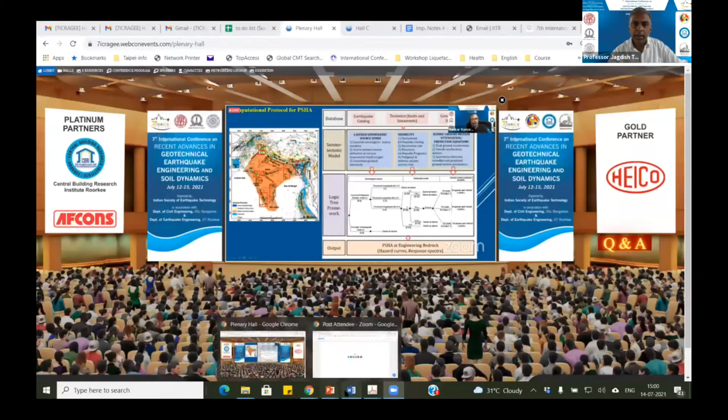Professor Amir Kaynia is a technical expert in vibration and earthquake engineering at NGI, and adjunct professor at the Department of Structural Engineering, Norwegian University of Science and Technology. He received his MSc and PhD degrees in structural engineering from the Massachusetts Institute of Technology. His areas of research and practice include earthquake engineering, soil dynamics, and soil structure interaction. He has published more than 170 papers in peer-reviewed journals and international proceedings and has held numerous keynote lectures worldwide. He has participated in many research projects funded by the European Commission, coordinated 3 major projects funded by the European Commission, the Norwegian Council, and Joint Industry Initiative. In addition, he has led many national and international offshore and onshore industrial initiatives, as a project team member for the revision of Eurocode 8, Part 5, on Geotechnical Earthquake Resistant Design. He is also chairman of the Norwegian Earthquake Committee for National Standards.

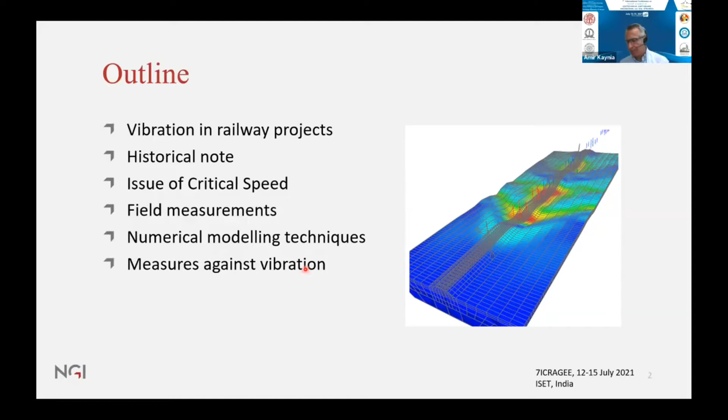This is the title of my talk: high-speed trains with different tracks on layered ground and measures to increase critical speed. This is a summary of the topics I will cover: vibrations generally in railway projects, a historical note, what is critical speed, field measurements, some numerical modeling techniques, and how to use techniques to reduce vibrations on these tracks.

Basically, the challenge is that railway lines are now coming into urban areas, with high-speed lines coming closer to congested areas. We could have soft ground, we could have areas prone to vibration requirements, and high-rise buildings, which actually make the situation worse. So vibration is becoming a more and more serious problem in urban areas.

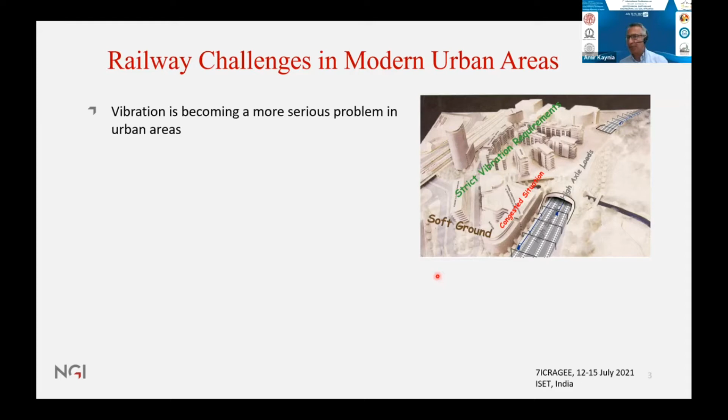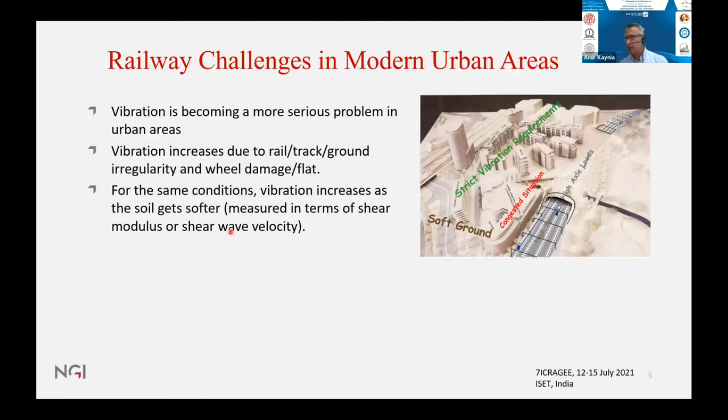Vibration generally increases due to rail and track and ground irregularity, and wheel damage, what we call wheel flat. For the same conditions, vibration increases as the soil gets softer. When we say softer, we mean in terms of stiffness, shear wave velocity, shear modulus. And vibration at the same time increases with train speed.

All these are intuitive factors. In many cases, for example in Scandinavia, very much north of Europe, we have soft soil, so soft that even ordinary high speed, like 200 to 250 kilometers per hour, reaches what we call Rayleigh wave velocity in the ground, leading to a condition we call critical speed. Loosely speaking, it's a well-known way of saying it among engineers, for which the track and ground vibration dramatically increase.

I have a video I will show you, you will see how it works. And in many countries, please realize that when we say high speed, it's easily reaching 400 kilometers per hour. But in many countries with soft soil conditions, even 200 to 250 could be problematic.

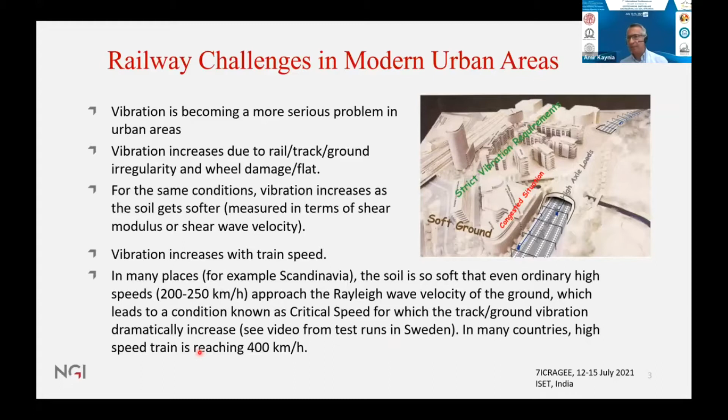I have in the written version of this talk, in the proceedings, in the book, some historical notes on the problem of moving load. It's like 2D solutions. I have a list and the history of the 2D solutions from many authors, with many different techniques and theories - potential theory, Fourier Laplace transform, Helmholtz decomposition, you name it. Most of the theoretical development was done before the 1970s, and a good work by Professor Frýba in 1973 nicely sums them up.

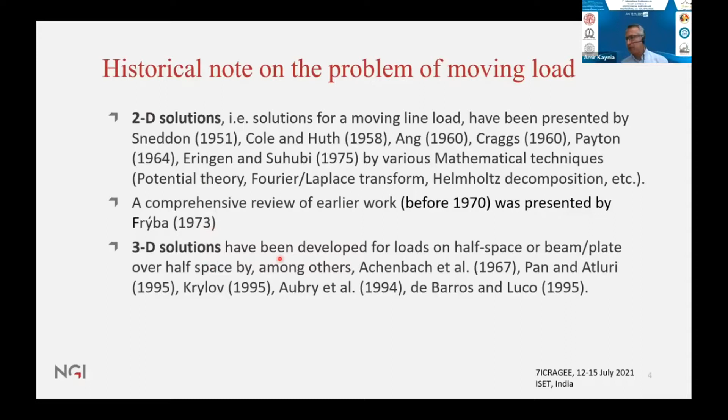And then 3D solutions, of course, more naturally are more important. I'm not going through these - they have evolved over the years and are mostly theoretical. I will go next to numerical solutions. These are all mostly theoretical solutions.

And then there is some terminology defined by Cole and Huth. They call it Mach numbers - when you divide the pressure wave velocity and shear wave velocity by the train speed, they are called Mach numbers, Mach velocities for train speed, and you will see why.

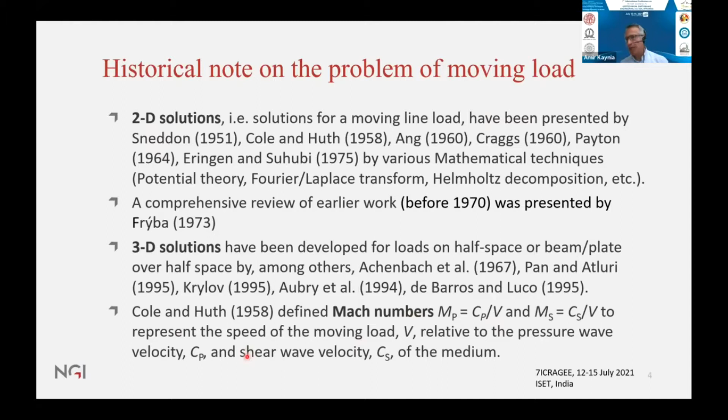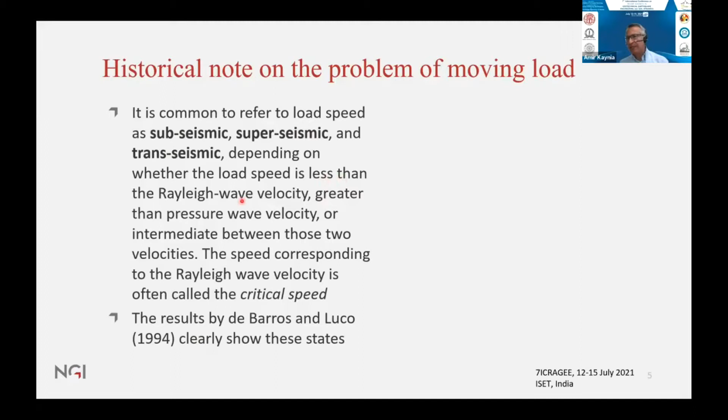Now, when we talk about high-speed lines, it is common to refer, when the speed is very high, to subseismic, superseismic, and transseismic, borrowing terminology from the aero industry, aerospace. It has to do with whether the speed of the train is less than the Rayleigh wave velocity, greater than it, or greater than the pressure wave velocity. And this image from the pioneering work of Barros and Luco shows what the situation is.

The train is moving - this is a simple load on a layered ground. As the load moves in this direction at low speeds, wherever the train arrives there will be a large displacement, and then it disappears afterward.

As the train speed increases, still moving in this direction, suddenly we see the formation of these Mach lines that represent large displacement in front, like plow lines, bow lines, like a boat on water - as it moves, it creates these bow lines behind it. Pretty much the same. I have a video soon to show you shortly that demonstrates this.

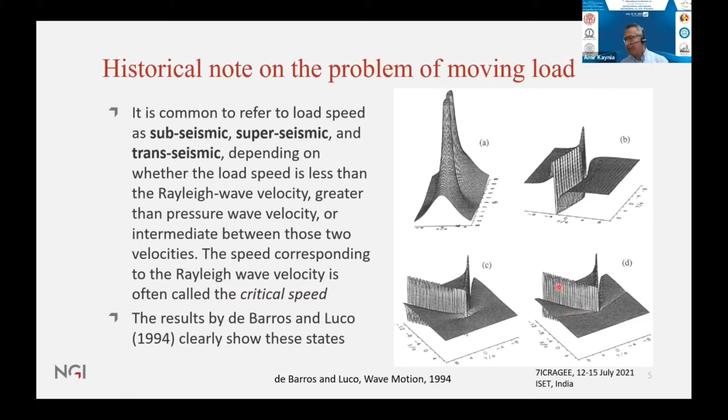As the train speed increases further, still moving in this direction, these bow lines actually bend further back and start to create some features also in front of the load, until we even come close to the pressure wave velocity of the region. And then another Mach line is created, so a very complicated pattern of displacement is formed.

Now, while these theoretical solutions were being presented, it was not until 1998 that evidence of this critical speed and large displacement was observed in test runs at a test site in Sweden. Thanks to the work of the Swedish Rail Administration, courtesy of them - the site was studied because they observed a lot of response as they increased the train speed, at a site which previously did not have any problem.

When they did a good site characterization, it turned out they found an organic clay layer, about 2.5 meters, with very low shear wave velocity, on the order of 30 to 40 meters per second. It's a good combination - they all corroborated and characterized the site.

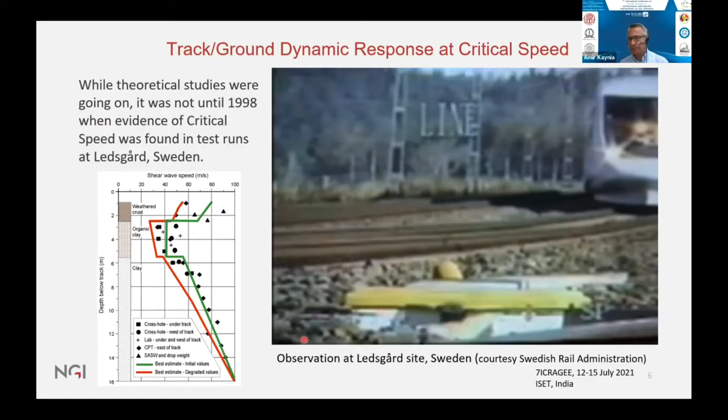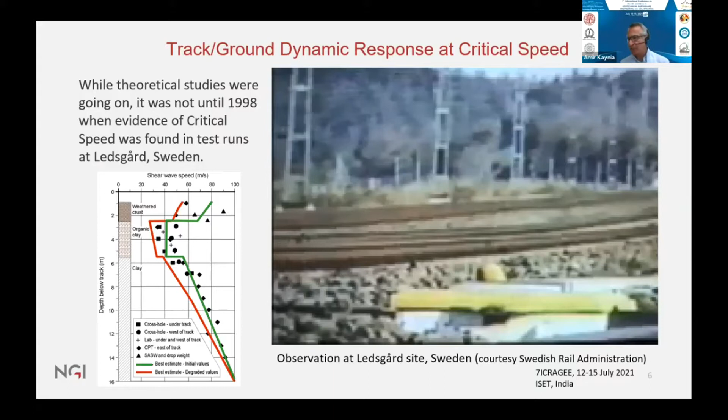I show this - this is going at about 140 kilometers per hour, and the camera is heavily moving. This was digitized after 1998, so the quality is not as good. So I have a more recent one, from like 3-4 years back.

When the train passes, watch here, because nothing happens until the train comes here. It is slow motion, and you will see waves generated depending on the speed of your receiver. You will see waves generated on the ground. So let's try that.

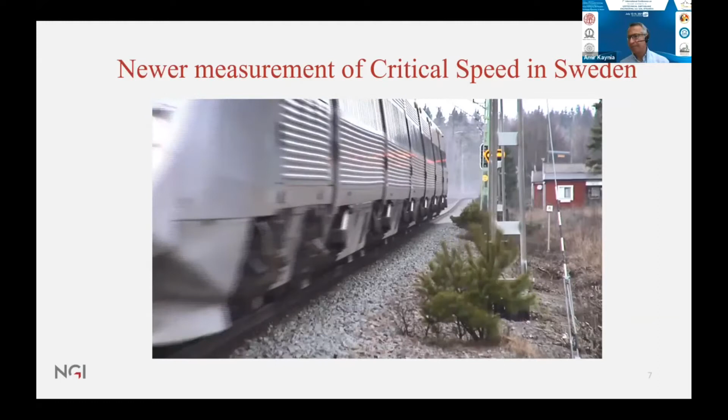I tried again here, look at here. So basically, this is an animation of the same case. As you see, the train is moving this direction, and these plow lines are created as the train moves, and then it creates vibration.

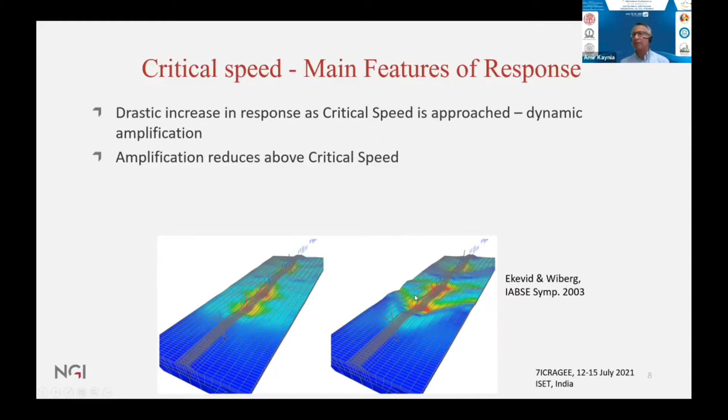What is the critical speed? The main feature of the response is a drastic increase in response as critical speed is approached. There is a dynamic amplification, which reduces above critical speed, so that's why it is called critical. Dynamic motions upward and downward happen. At low speed, there is no upward motion, it's only downward. But when you reach this speed, you start to get even the track vibrating up and down, and plow-shaped wave fronts, called Mach fronts, appear on the ground surface as this moves.

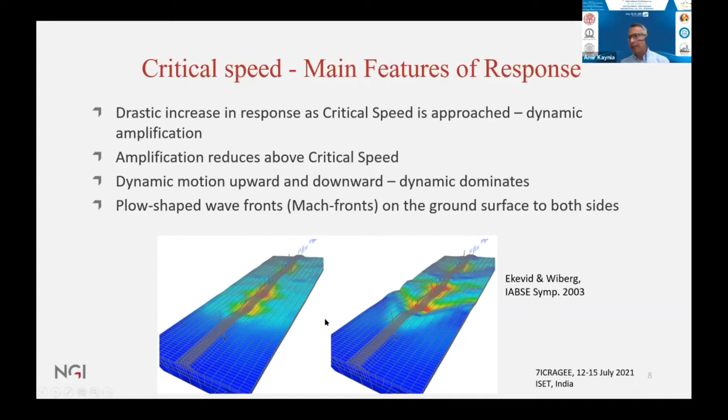As I said, I had a summary of theoretical solutions, but more recently, because people want all the features of the train track, layering, even non-homogeneity, heterogeneity, everything, mostly the solutions have been around finite element solutions, combinations of finite element, boundary element, Green's function solutions. Some people use what we call 2.5D finite element, which means just a slice of the element, using Fourier transform in the other direction to make it faster.

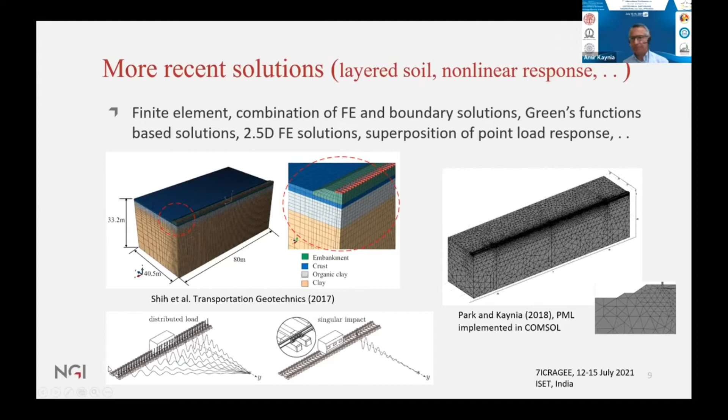So these are examples from the literature with references underneath them. This is a full finite element model with good boundary conditions, if I'm not wrong it is Abaqus. These are cases where you get the response by superposing the response from individual loads. And this is the 3D model in COMSOL we tried at NGI, from this paper, that shows the complete model. It has PML in it so that we do not need a very large model. This is the section, and this is the section. So a lot has been done recently.

And we have another model for filtering, for screening, and for capturing the mechanism of wave propagation in general, based on a track modeled as a beam on a layered ground. It's through a kind of decomposition method where the load interaction between the track and ground, called P, and the response of the ground is expressed through what we call Green's function, which is the displacement at all these points as a result of these loads. Then the track itself is modeled by a finite element, straightforward. Once you put them together, you get the complete response of the system. This F is related to the stiffness of the ground and the stiffness of the beam, and this is solved in the time domain.

When we say Green's function, it's the solution at all these points due to a unit load. Usually there are analytical solutions for them, solved numerically by time integration.

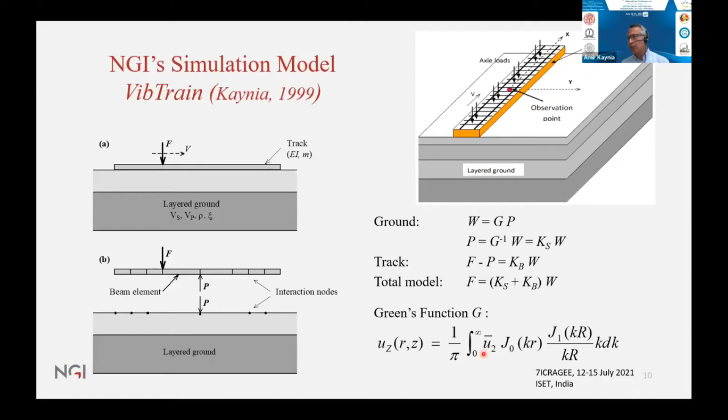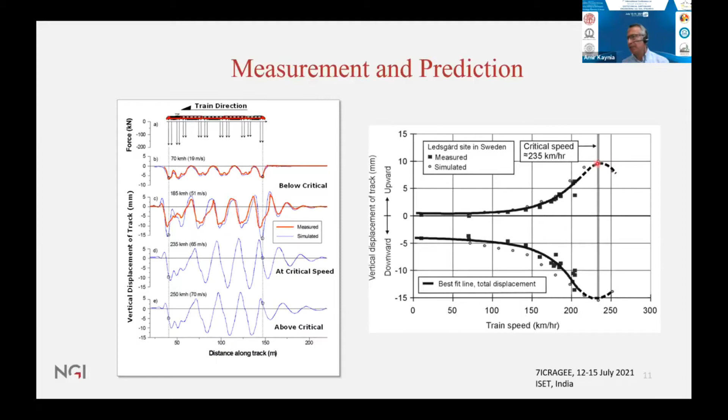The most recent work is by Professor Kausel of MIT, who presents this critical speed very nicely in a mathematical sense. But for engineering purposes, it's easier to visualize as the point where maximum displacement is observed.

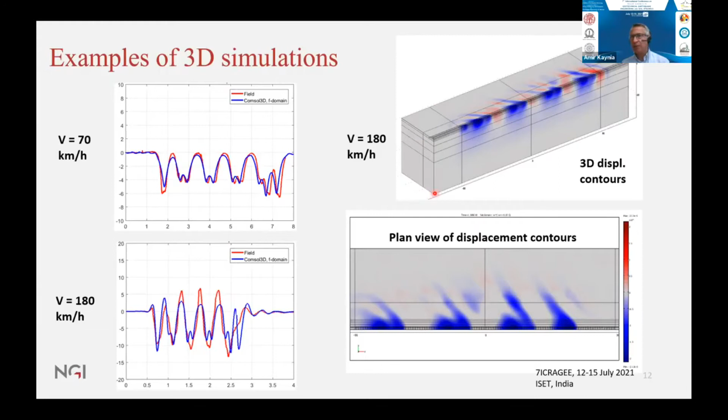Now, having said all this background, what do we do? How do we deal with it? Now we could have a vibration problem. How do we deal with it? There are different ways.

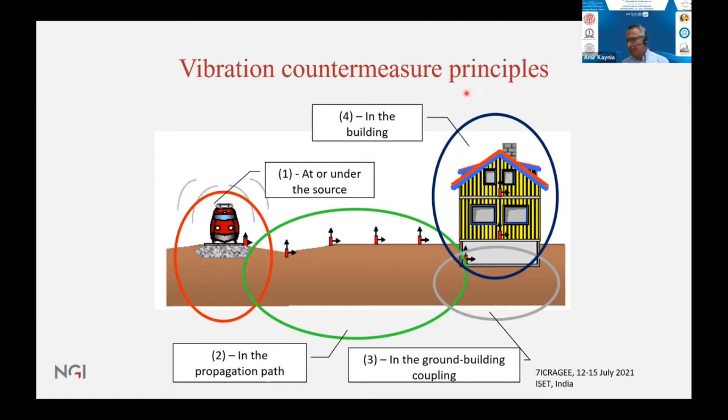So there are different ways of dealing with these vibrations, and they depend on the type of vibration. Basically there are two regimes when it comes to ground vibration from trains. One is usually high frequency, over 20 to 25 hertz, usually created due to rail or wheel unevenness, corrugation, defected wheels, cracks, or flats.

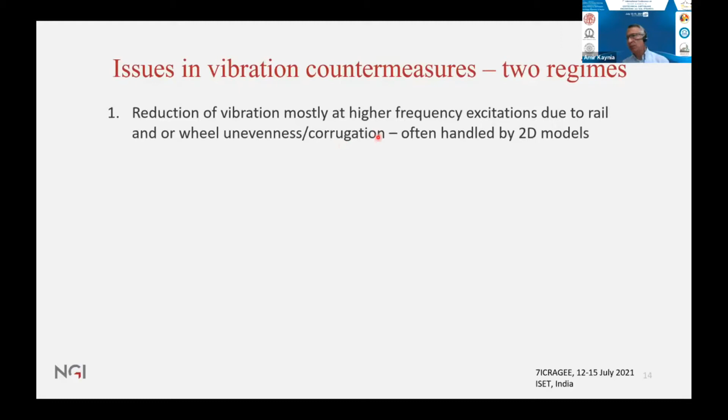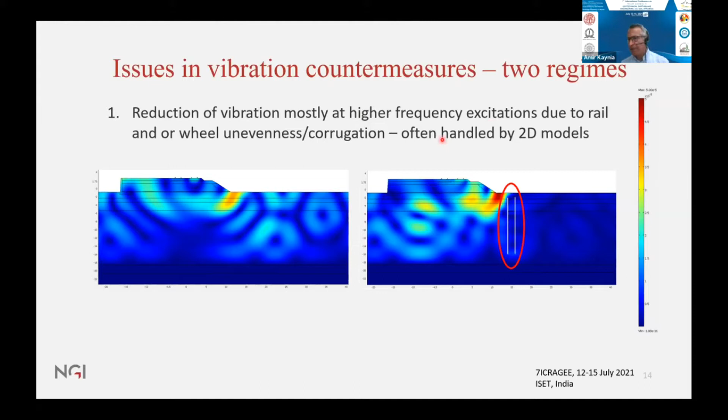But when we come to the critical speed issue, it's created basically at the source, and putting such countermeasures doesn't help, because this is lower frequency and these measures are usually very ineffective. So one has to do something with the track itself, otherwise the track will be in trouble.

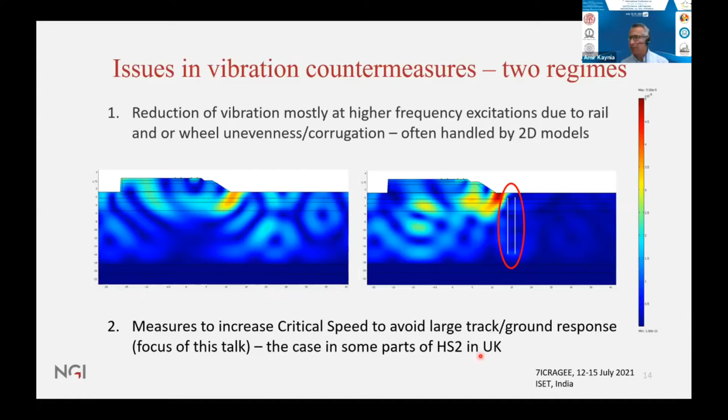There are ways to deal with this happening in many places. The most recent example is project HS2 in the UK, which in some areas has to deal with it. There are different solutions.

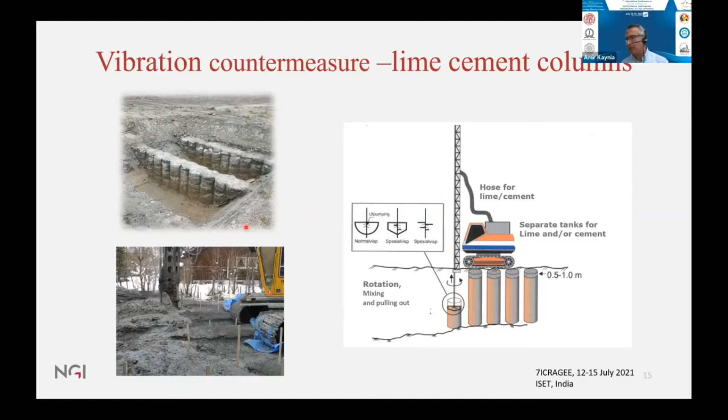One of them is ground stiffening, or ground improvement. One very popular in Northern Europe is the lime cement column technique, mixing the ground with cement as soil is extracted, then making a series of stiffer, half-concrete soil columns to make the ground stronger. It's a very fast operation and rather cheap.

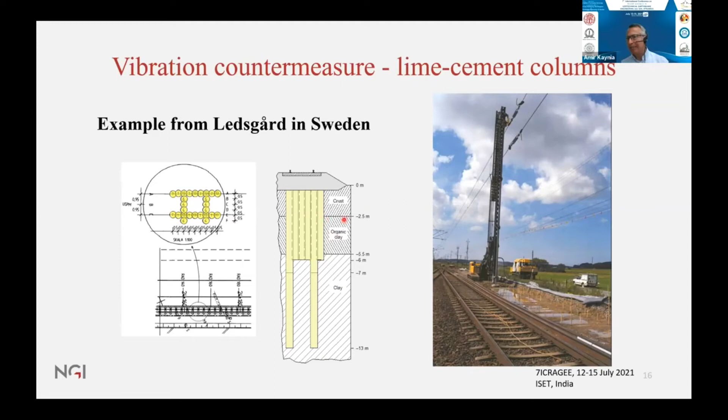This was tried at the site I showed you that had this problem. There were two lines, so one line was removed and only one was used, and during that time this technique was applied, penetrating through the organic clay layer, with some columns driven further down, and it turned out to be very effective.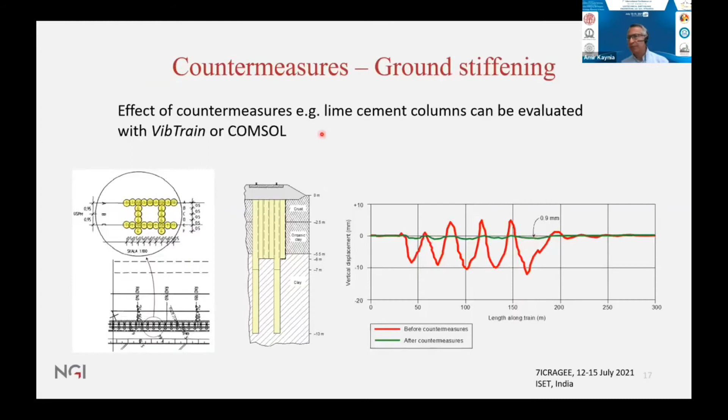The red shows the displacement as the train was passing, with large displacement over 1 centimeter. After applying this countermeasure, it was dramatically reduced to almost nothing, so it was pretty much effective. We also did a simulation of it in COMSOL, which I won't show here, but I'll show other results.

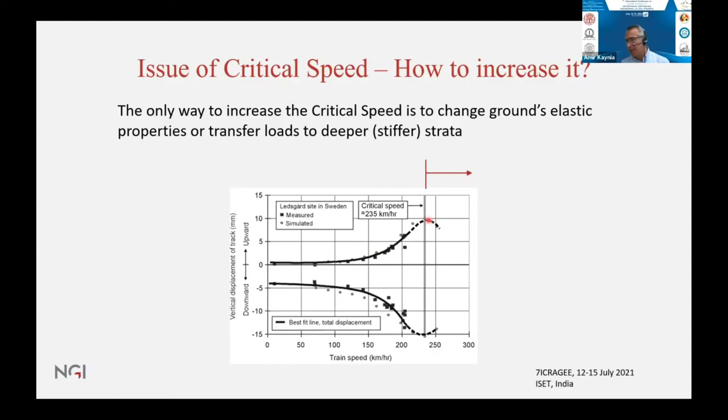Now, back to the issue of critical speed, how to increase it. The best way to avoid the problem isn't just having a trench next to the track; you need to do something at the track itself, so that this critical speed is increased, pushing the problem area to the right. How to do it? In my paper, I investigated three methods, three cases I considered.

The first case is stiffening the ground.

Let's look at stiffening the track and embankment, like putting a stiffer embankment, or even putting a very stiff beam underneath the track ballast and making it stiffer, which intuitively makes sense. As the train goes, it just distributes the load better.

The second one is stiffening of the ground. Rather than simply replacing a part of the ground with some improved material like crushed stone, or injection and grouting - there are many soil improvement techniques - you could also use piles. So basically put the track, whatever it is, a beam or whatever, on a series of piles. It could be one pile or several piles, but in the area, because this problem isn't necessarily everywhere, it's certain stretches.

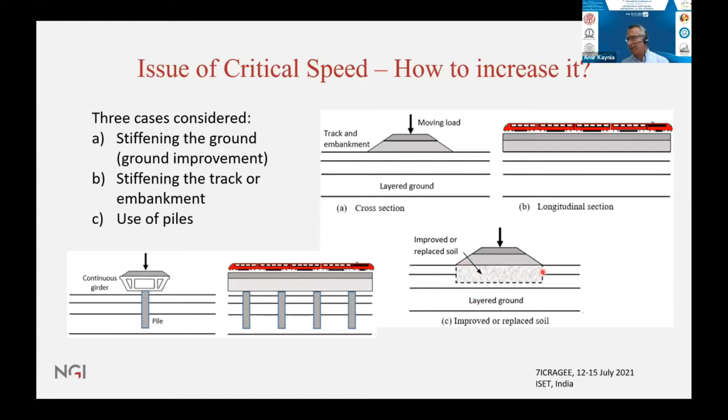Pile driving is simple, so this could be done rather easily, and it's very reliable, because then you are sending all the loads to a deeper layer rather than being worried about gradual settlement effects. So each of these methods has advantages.

Now, to measure the performance of these methods, I first look at my base case, which is no measure, the case I showed through the video. It is the site with this organic layer, soft soil. These are the train loads, exactly as used in the test runs. These sets of figures are displacements, and these are the corresponding ground velocity on the track, particle velocity, and this is displacement - the same information.

You just need to think about this one. These are different speeds, this is time. So as the train passes, and we look at a given point as the train passes, when the load comes, this pattern of displacement is observed at a given point as a function of time.

So this is at low speed, as we expect. But as the speed increases, the pattern starts to change, and then completely changes, going to this superseismic and transseismic regime, with the track moving upward and vibrating. The numbers are dramatically larger - this is below 1 centimeter, and this is already over 2 centimeters.

So this is what I call the base case, as the case was there, because we have numbers for it, we have data for it.

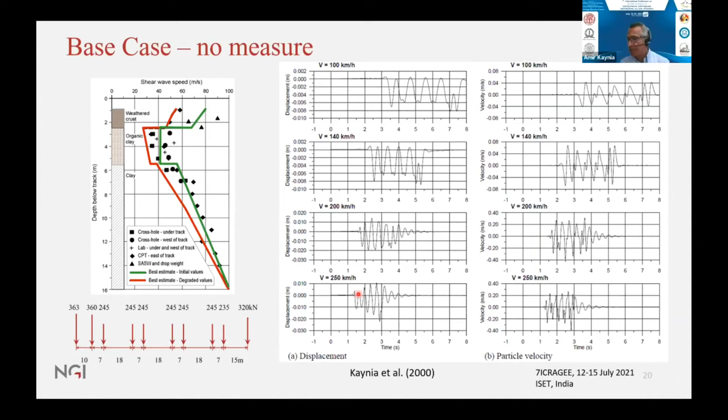So the first case is stiffening of the ground - ground improvement. What I did is replace the material; this is a very effective method and could be done in different ways. As I said, it could be injection, grouting, or replacing the material. In this case, I replaced it - the peat layer, the problematic organic layer, was completely replaced.

So this is like the base case, I just copied it here for reference, with the same velocities. Now with the new track - let's say the track is the same, it's just the ground that's changed - you will see that, please note it's not the same scale. If I used the same scale, these figures would be very small, so this is much smaller for the same speed.

Displacement is considerably smaller - look, this one is 0.003 and this one is 7-8 times larger. So definitely it is a very effective technique. Of course, in each case, as you increase the speed, vibration displacement and vibration acceleration increase, but if we use that as a measure, it is an effective technique.

And of course, one could go ahead and optimize. If you have a good tool, like VibTrain that I showed, you could easily optimize how much stiffening to apply, because we don't want to make it too stiff. Too stiff has its own problems, actually - it causes issues for higher frequencies. So there's a balance in how much we want to stiffen it.

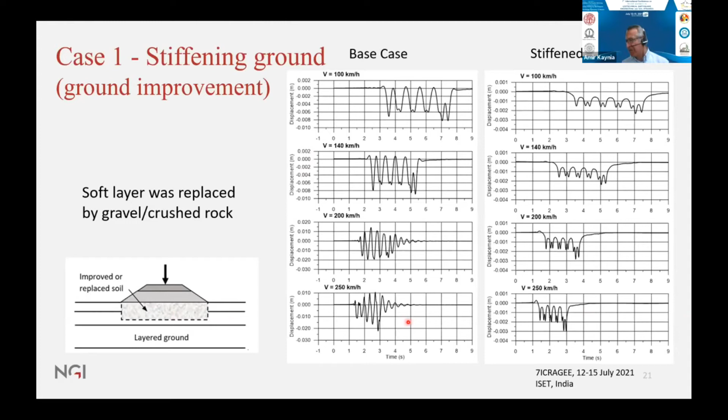So what has happened with the critical speed of the new system? I increased the train speed and computed the ground displacement as a function of maximum train speed. As the train speed increases in those simulations, I stopped at 650 kilometers, but you see that at about 450 kilometers per hour, you get the maximum response, and then after that it reduces again. This is what could be loosely called the critical speed of the new system.

If the design speed is about 40% lower than that, in this range, it's a success. It's a good solution. We're way away from it. So this is that one.

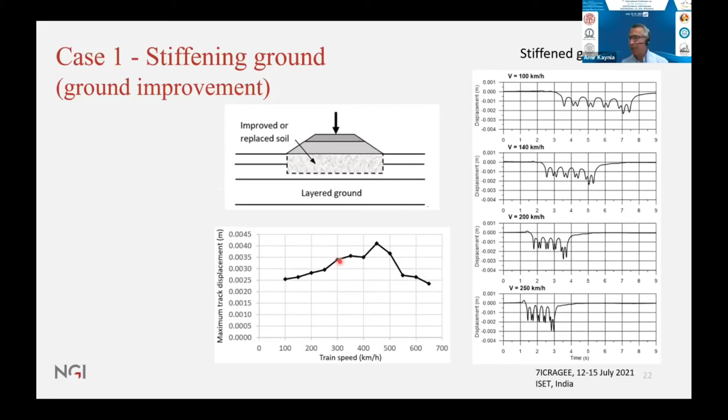But then the other solution was track stiffening, because people could say, well, this is easier—we just simply make a stiffer embankment on the ground. We don't need to touch the ground, or maybe even put a girder beam, a stiff beam underneath the ballast and make it stiffer. In other words, the track is stiffer.

So I'm showing only two speeds, for example use of a stiff beam. I'm showing just two cases: one is the base case, this is the same as before with the two speeds, and the stiffened track. When I say stiffened track, I mean the results are when the stiffness of the embankment or the beam together is quadrupled compared to the base case, so 4 times.

So we see an improvement. It's the same scale in this case, so we see an improvement. However, when I see this upward movement, there is a good improvement, but when I see this thing, it gives me a bad feeling that maybe I have not fixed the critical issue. So it has helped, not dramatically. Stiffer track reduces the displacement and vibration, fine, but they do not noticeably change the critical speed, which I'm going to tell you shortly, because I see this feature of this upward movement. Displacement reduced is not sufficient.

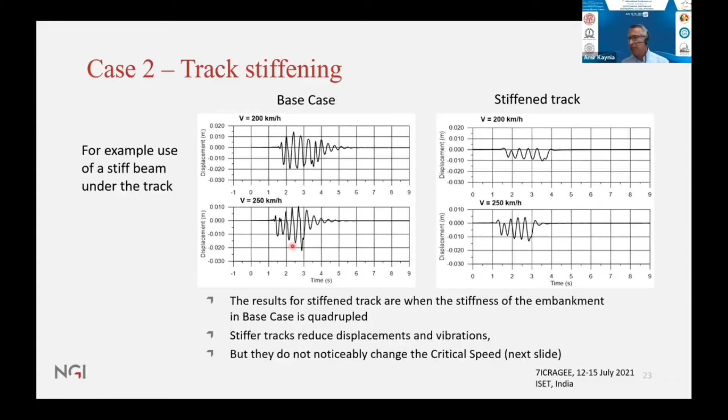And we should realize that this is not good, because if this is in an urban area, the houses around start to feel this. So even if the level of displacement of the track is okay, this is not at all a pleasant solution.

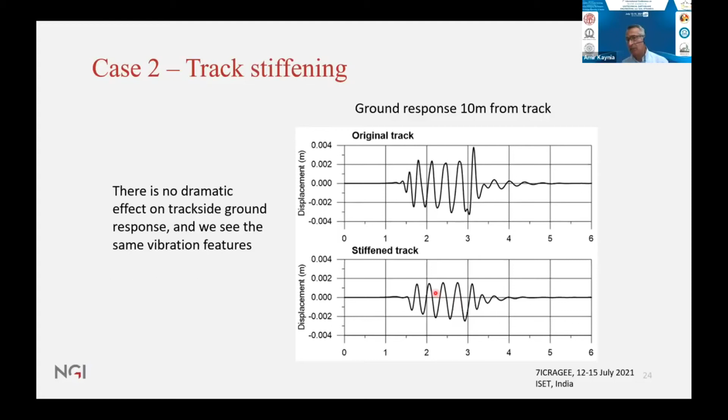It works very well. What I'm not showing here, but it is in the written paper version, is that vibrations can be reduced dramatically close to the piles, where the piles are. But resonance of the beam between the piles could cause large vibration at mid-span. This is not a critical speed issue—it's because the beam in between could go into dynamic resonance.

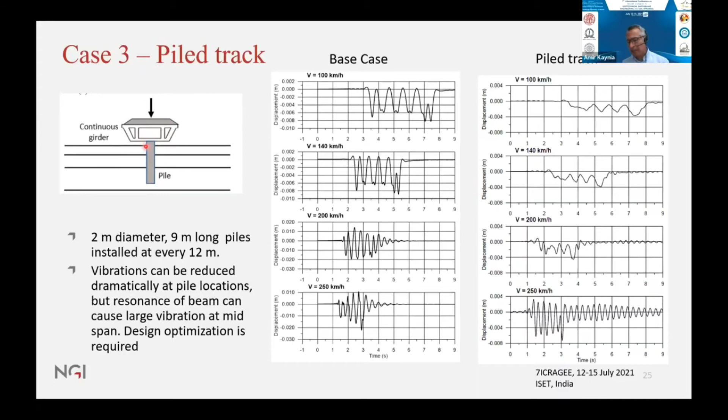So a design optimization is required—maybe a stiffer beam, maybe closer piles, for example smaller piles but closer, that sort of thing. But at least it is a very effective solution. It has the extra advantage that you pass the load on to a deeper area that has less settlement, so it is in a way a good longer-term solution.

And that brings me to the summary: there are basically two response regimes when considering reduction of ground vibration from high-speed trains.

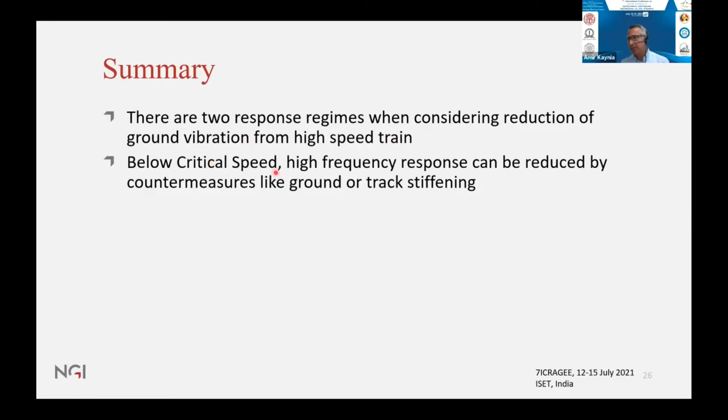These two regimes are high frequencies, basically due to irregularities of the track or the wheel that cause higher frequencies. For that, there are other solutions, that's not the topic here. Below the critical speed, which was the focus of this talk, if it's high frequency, we could reduce that high frequency response.

But for this critical speed, this is the one I'm trying to say. We are still below critical speed, but high frequency is the issue. If the train speed is close to the critical speed, the only solution then, it's not like trenches or other things, is that we should reduce the response.

To reduce it is to increase the critical speed itself by ground improvement, like stiffening it or use of piles, but not by track stiffening, not just putting a stiff beam on the track on the ground. It has to be something inside the ground to change the characteristics of the propagation medium.

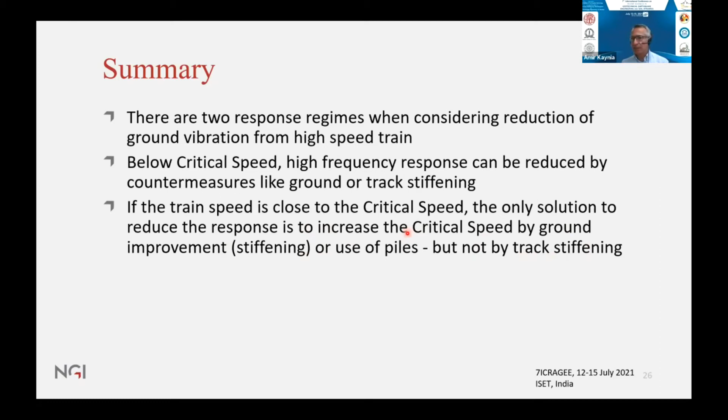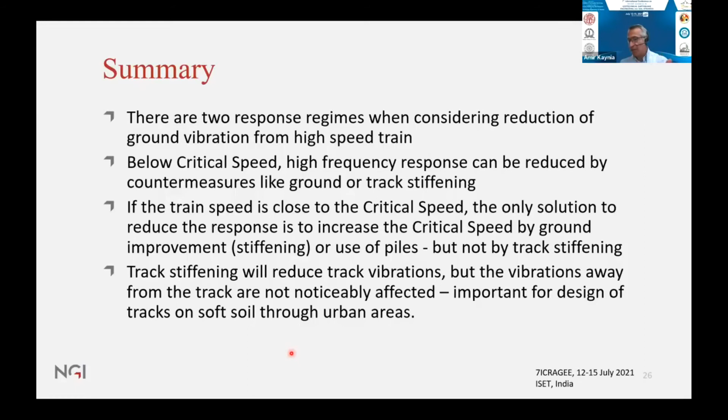Track stiffening will reduce the track vibrations, but the vibrations away from the track, like trackside, are not noticeably affected. This is important for design of tracks on soft soil through urban areas, because residential areas or sensitive facilities come very close to the track. So even if you reduce a little bit of the track vibration, the vibration is still there for the surrounding area.